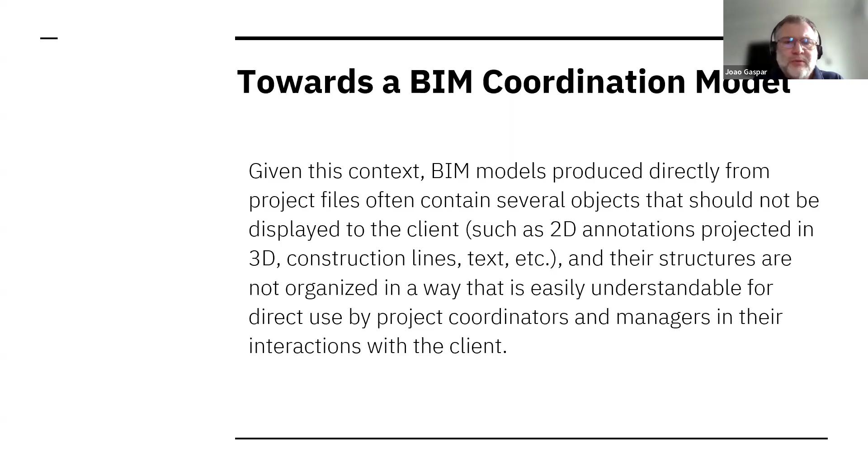So this is what I was talking about: during the infrastructure design process in 3D modeling software, such as Civil 3D, OpenRoads, and others, files are organized and produced based on the designer's vision, aimed to efficiently represent the best on-site execution of the technical solution. Given this context, BIM models produced directly from project files often contain several objects that should not be displayed to the client, and their structures are not organized in a suitable way that is easily understandable for direct use by project coordinators and managers in their interactions with the clients.

So when opening a raw design model directly in Trimble Connect or Navisworks, Solibri, or other BIM coordination software, we will find it necessary to reorganize the model, eliminate objects, and make other adjustments. So I'm going to show you how you can adjust these raw infrastructure design models into IFC 4.3 models suitable for BIM coordination, improving communication and model visualization in coordination software without interrupting the designer's work.

This design model that I'm going to use as a reference for the hands-on is a design model from a specialist called Elliot Grubb. From this specialist, I took the DWG model from an Autodesk University presentation. And here's the credits for Elliot for the design model that I used in this presentation. I don't have any more PowerPoint slides, so I'm going to use the software to tell you how this can be done.

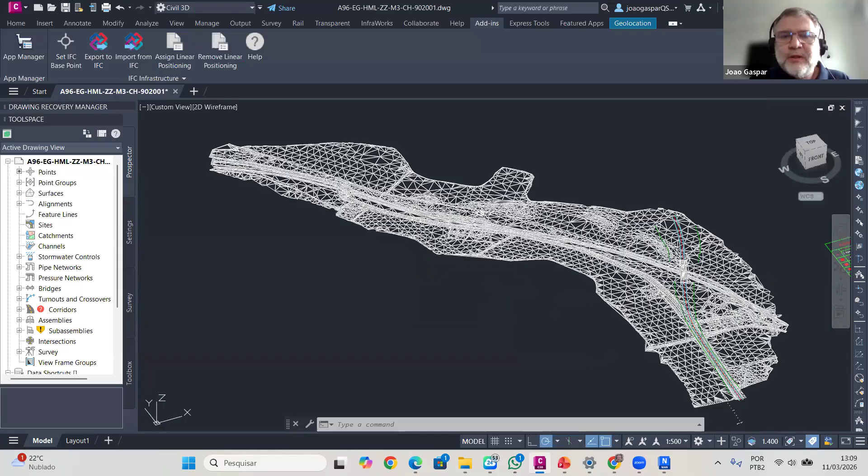So we have Civil 3D software here with the design file, and it's structured in the way that the designers need to work. And we know that we have to copy these models or export these models as IFC in order to show them to coordinators and other strategic positions in companies, or the parties in the contract, so they can view and discuss the design.

Usually the process of structuring the model so that it's correctly shown in IFC is not a streamlined way yet. Sometimes the designers spend a lot of time just doing these adjustments, which will be used for just one meeting, instead of doing what they do best, which is the design.

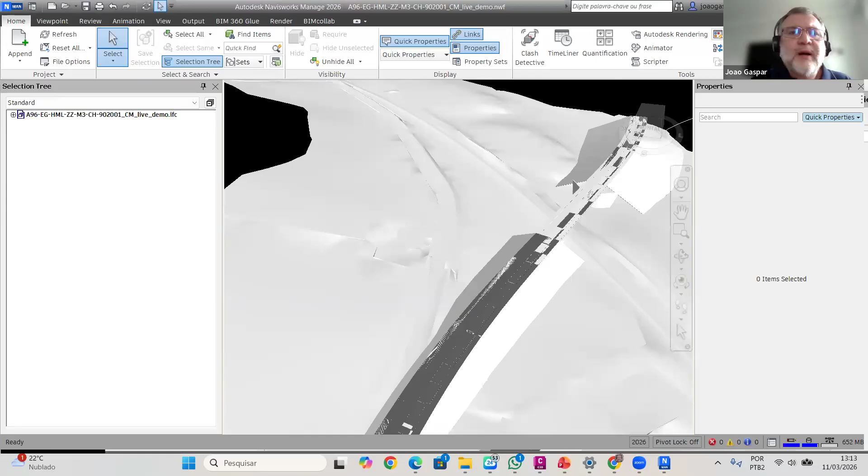I'm going to open the as-is model using Navisworks. I have already opened it here. Let me see if I can see the name of the file. Oh no, this is another one that I'm going to show you. I'm going to open the as-is model to show how Navisworks opens the design model in IFC without any adjustment. It's also already here. So this is the IFC model that came from Civil 3D without any adjustments.

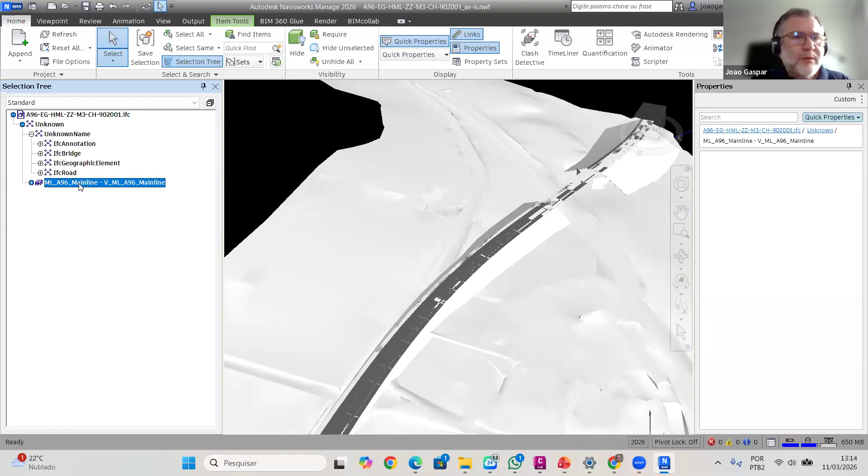And here is the spatial hierarchy tree. You can see that we don't have a name for the project or for the site. In fact, this is the IFC site and IFC project, and we don't have a name for them. We have a lot of features from the IFC annotation entity. We will not use this. We are going to use just the spatial hierarchy tree.

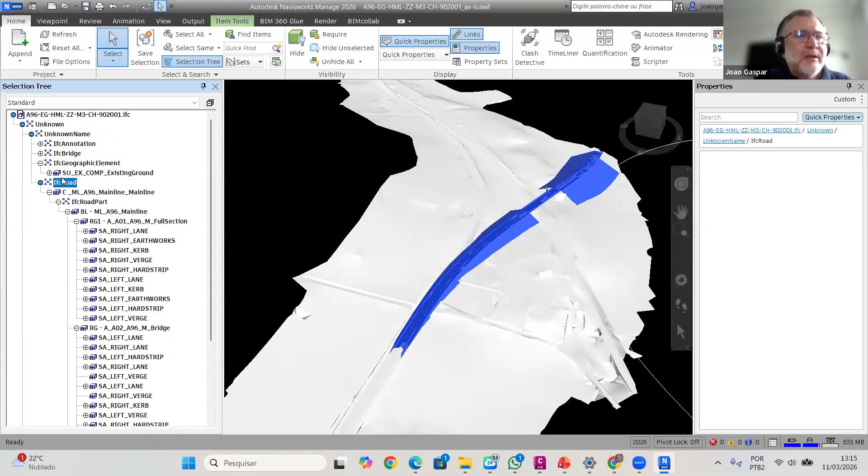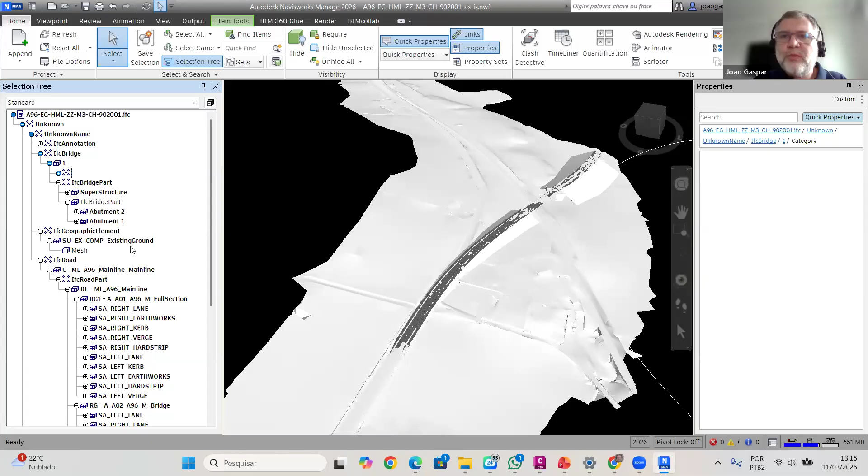We have an IFC road, which is the design of the road, and we have here a road part and other road parts, and we can see it gets a little messy, and the geographic element without a name that I can understand. We have a bridge which is called just number one, entities without names, and bridge parts inside bridge parts without the necessary structure, which makes it difficult to show in a coordination.

If you open this IFC model in other software, as you are going to see, I'm going to open it in Solibri Anywhere, in BIMcollab Zoom as well, and in BIM Vision. I think it's nice for you to see that different BIM coordination software show us the information in different ways, and you will see which way works best for you.

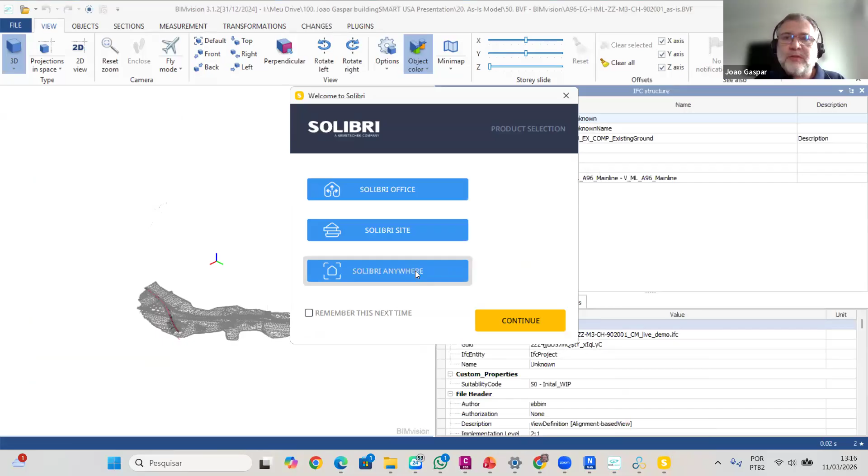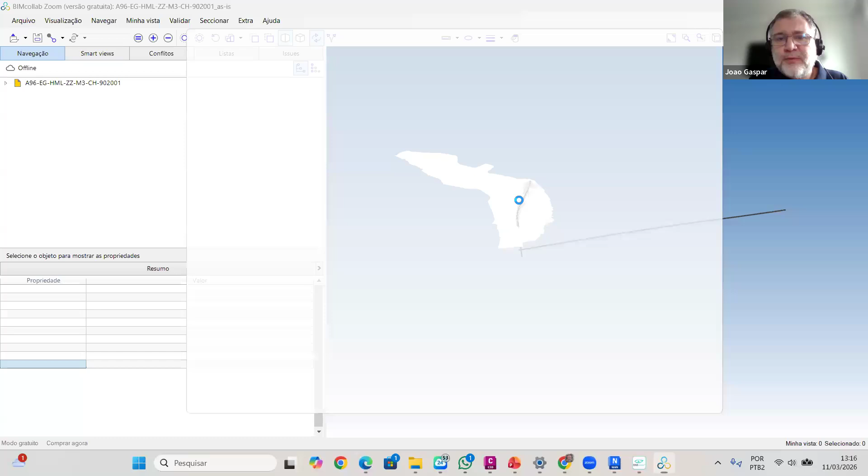So that's the way, because it's not the same way that the information is shown in the software. So in BIMcollab Zoom, we have this kind of view and this kind of structure. So we have again unknown name. We have a bridge without a name.

So all of this is happening, and this is the way that the model comes out from Civil 3D without any adjustments. We have elements, entities that don't have any element inside, so maybe they should not be here. And we have a lot of issues that we can correct, we can adjust for better information in a coordination meeting.

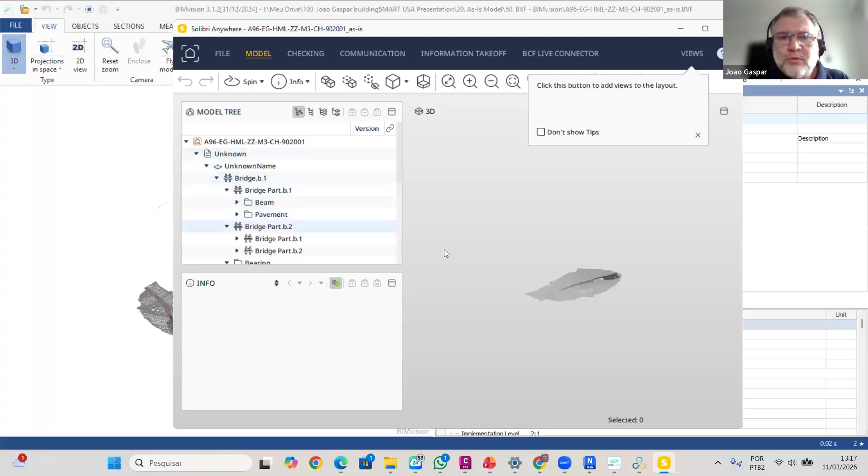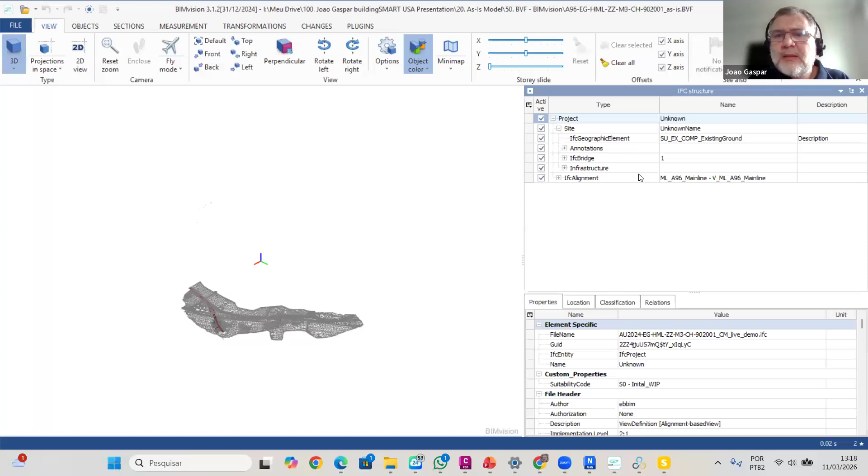And we can show that it happens, the information is not quite well structured in any of the software that you can use to check the information to go to your meeting, right? I'm using a software called BIM Vision here, the free version, and I would like to take a pause on this software specifically, because it's the only one that I know for now that you can see at the same time.

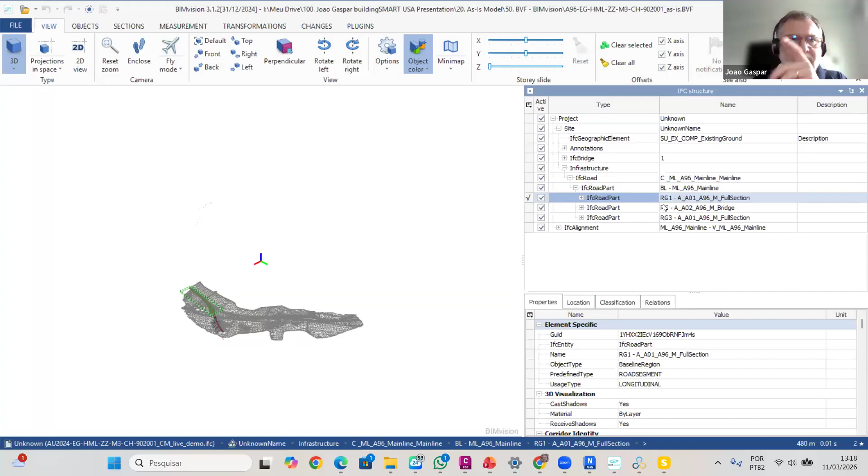You can see the type, the IFC class, and the name in the same line, and it's very good for me to see which road part is called by that name, without going to another menu, or without clicking, or without looking for it in another part of the screen. So this is very nice for me to see.

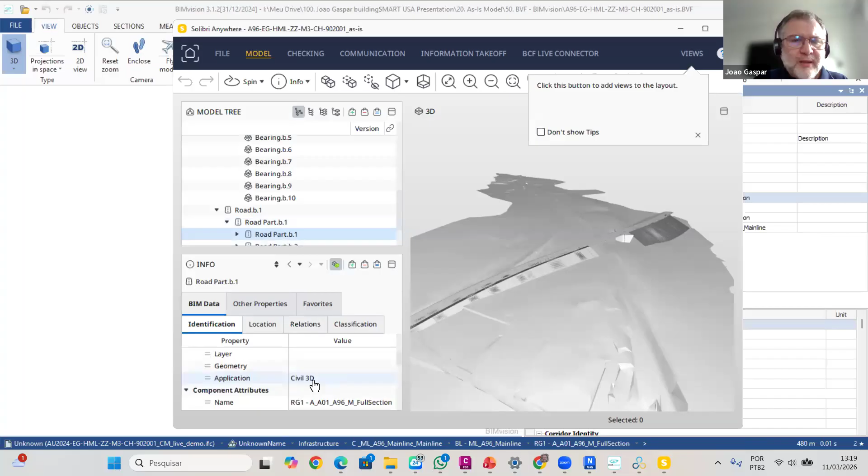You can see that we have some difficulties here in some software that I can't read in a very easy way. I can't read which is the name of this road part. I have to go down here to check, and it also happens in another software. I have to open the menus to see which is the name of what part or what entity.

And I'm going to use this one software specifically here for this purpose. Then I can read just side by side. It's a very nice thing to show. All the software that I'm using is free to download, and all of this software can use the original or the adjusted IFC as reference.

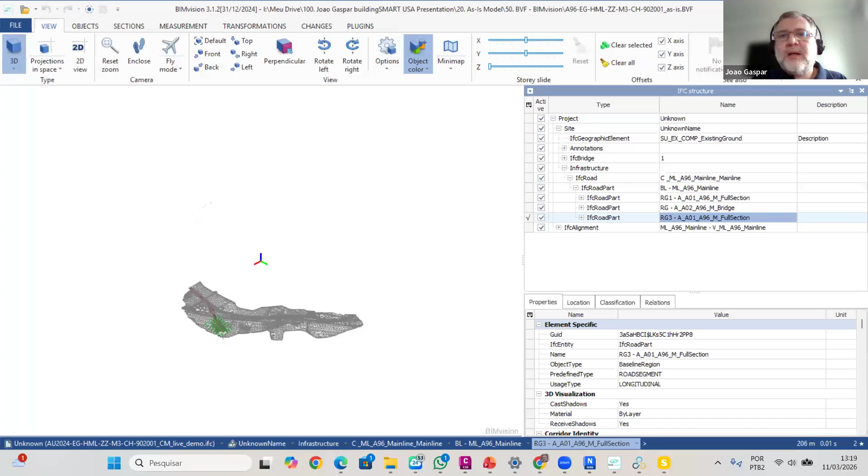So when I'm going to do my adjustments in the IFC model, I can do these adjustments just once in the IFC model, and all of the coordination software will show the updated info, right? And now I'm going to do some adjustments for us to see how it's done.

So I have another folder which I just called BIM coordination model, and I have two files here. One that I call the coordination model so far, which is the adjustments that I did so far, right? And another file that's for the live demo, which is the original IFC file.

And this file is just referenced in all other coordination files of all of this software that you can use to compare, and all of this BIM coordination software have different features. With BIM Vision, we can do some kind of analysis, some resources BIM Vision has that BIM Collab Zoom doesn't have, and it happens the same way with Solibri and Navisworks.

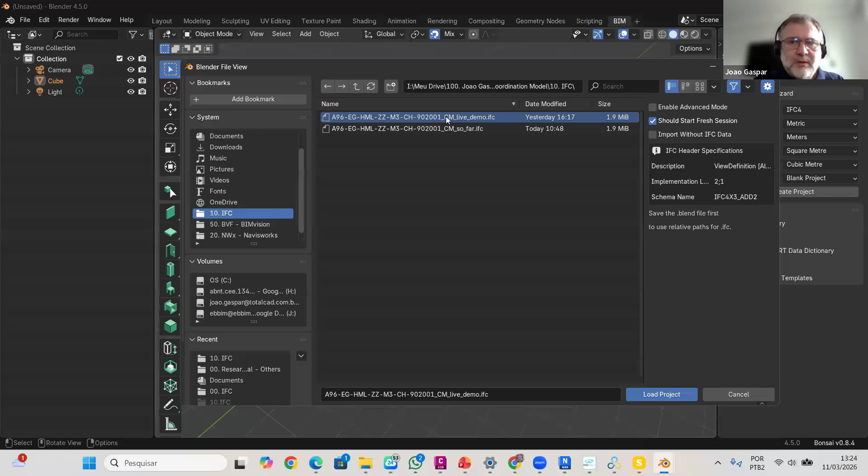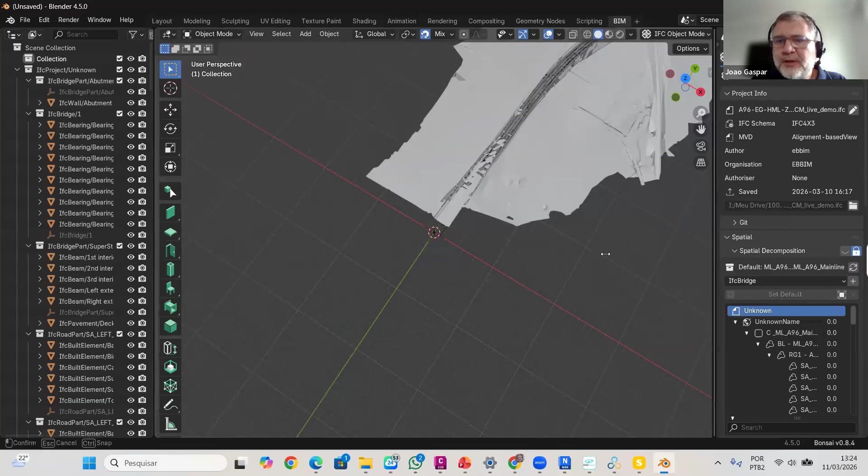So I'm going to load the live demo model in Blender with the Bonsai add-on. And now we have the model here. You can see the spatial hierarchy of the model on the right side of the screen. And you can see that, just as I was showing in Navisworks and the other software, you have the IFC project without a name. We have the IFC site without a name.

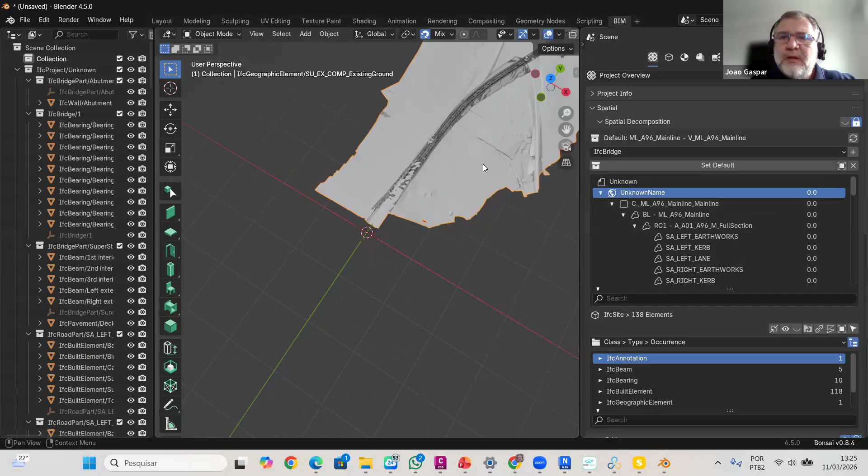We have the geographic element, which was the actual terrain, the actual ground, with some kind of name here that maybe doesn't matter for us to show the client, and other information that I want to adjust without, as I said many times earlier, interrupting the designers that are doing their job, generally with a tight schedule, right?

So here in Bonsai, I can just put the name of the road. A96 is the real name of this design. This road is the A96 in Scotland, as I have studied from Elliott's works, new road design, something like that. My concern here is just what is going to be shown to my clients. So I have to do these simple adjustments here, and I'm going to save the project.

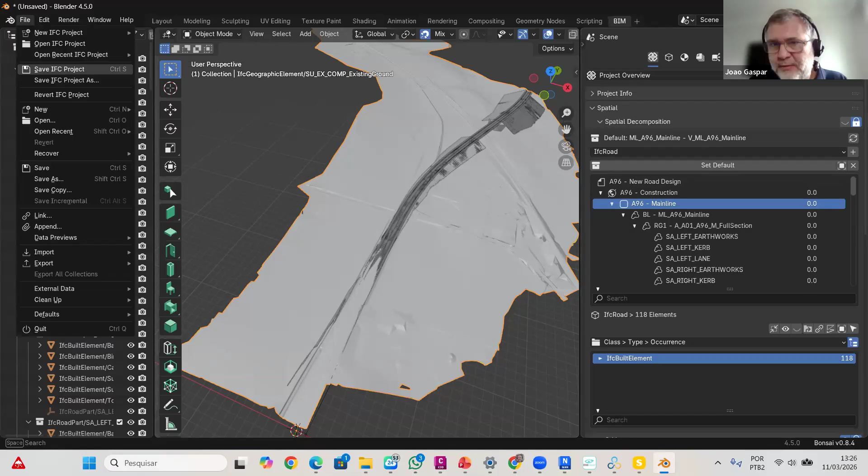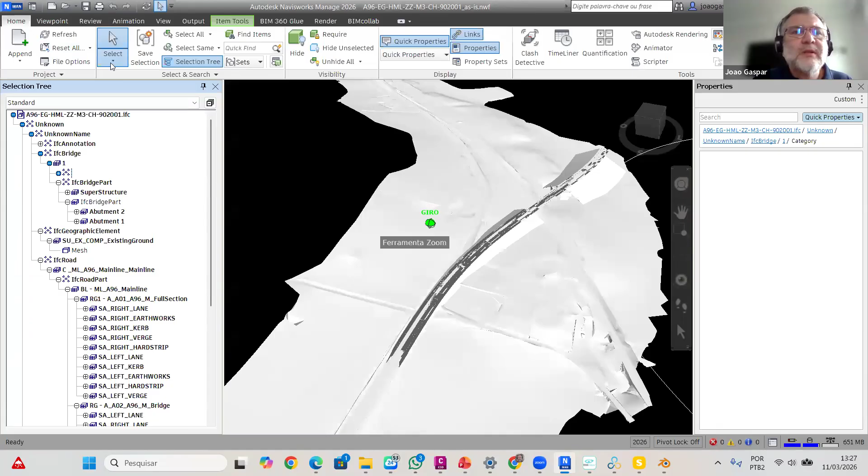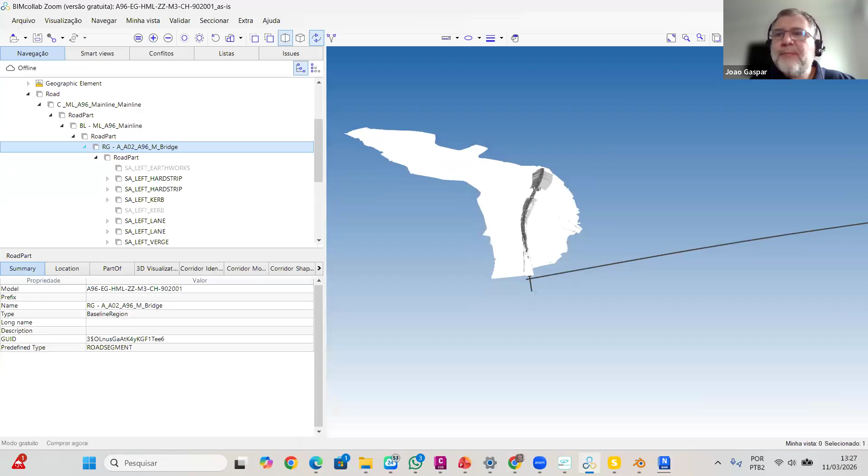I'm going to use this very old technique, which is the reference technique. When I open the coordination model in any of the software, I just have to update the information. I'm going to do this update in Navisworks. I'm going to open the live demo model, which is connected to my IFC model. It's going to show the correct information because it's reading in real time. And I'm going to open it in another software, BIMcollab Zoom, for you to see how it works in more than one software.

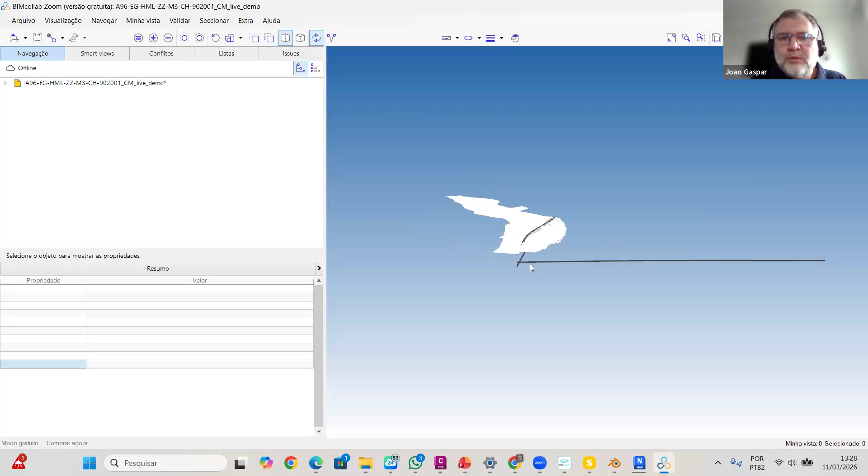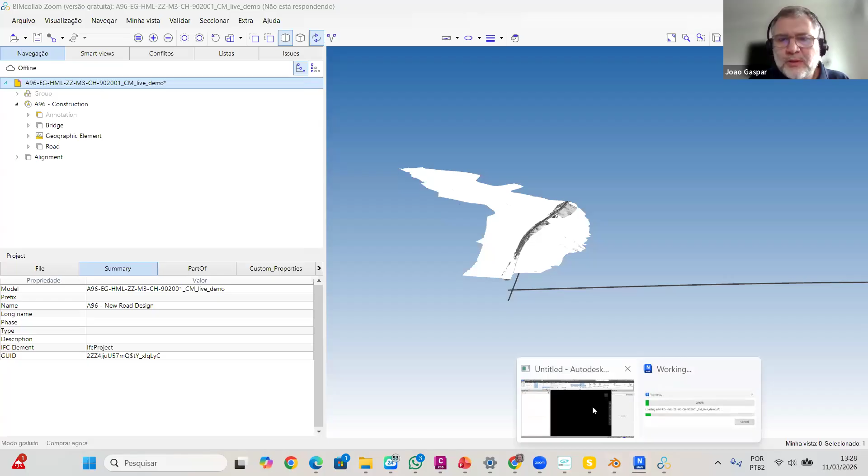And this is a very iterative process because we have a lot of little adjustments to do. You are going to learn that you have to do this going in and going out all the time, because you need to see, in the software you prefer to use in your meeting, if you are doing well. So now I'm going to update the model here in BIMcollab Zoom and in Navisworks as well, which is opening here.

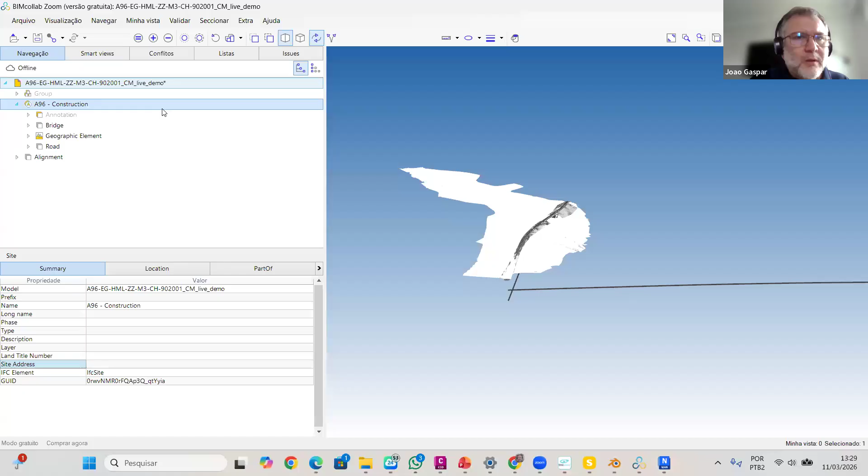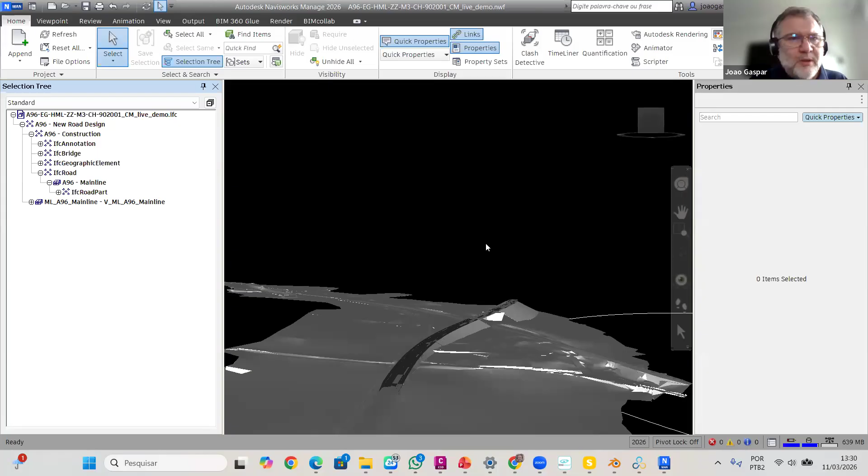I'm going to wait a little more for Navisworks to open. Yeah, and here you can see new road design. So I'm going to do this in BIMcollab Zoom as well. Here it has A96 construction. I haven't adjusted the name of the bridge yet. The name of the road I have adjusted, and it works and it's shown in any of the software I'm using to show the information. So this workflow is a very easy one, and anyone can do this.

I just forgot the name of the bridge, and I'm going to check it right away. The bridge is called One. The designer is doing a lot of work, so the bridge is just called One. I'm just pretending that the name is New Bridge. You can see that the new bridge has another bridge part here with two walls. This is a bridge part. This is another bridge part which has a wall inside. So a necessary bridge part, and two unnecessary bridge parts.

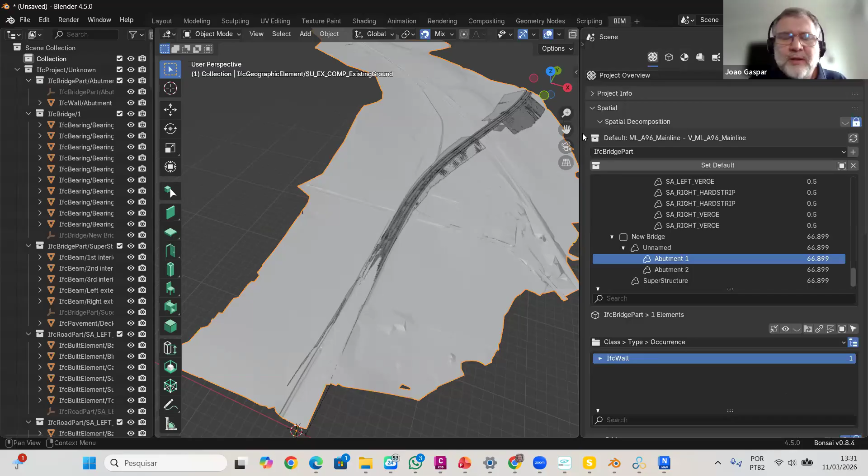I'm going to show you that we can also adjust the order and change this hierarchy part for this one up here, and streamline the model for the best comprehension of the client. And another kind of adjustment I can do here: I can do adjustments in property sets, in texts, and in data if I need to. I'm not going to do this right away, but you can do that here.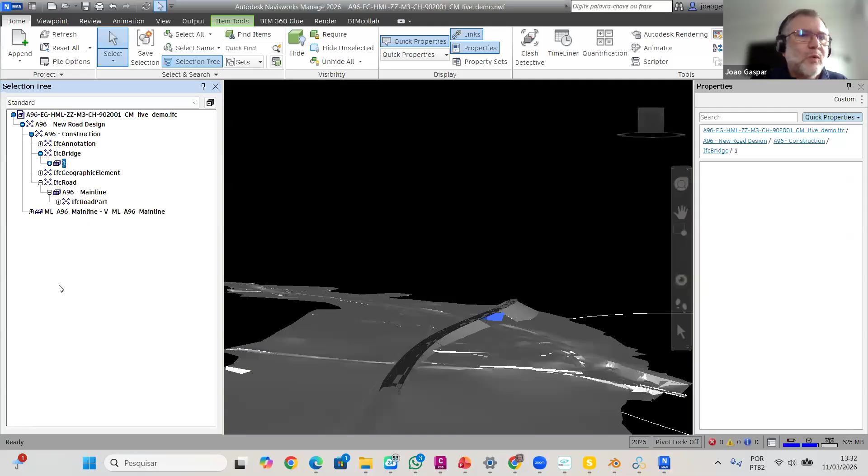I think the most important part of my presentation is showing you that you can do these adjustments in this model in order to show the client in a meeting, and you can check if what you are doing is doing well.

I just clicked on refresh, and now I have the new bridge name. I can do this process as many times as I need to, as I like, or based on the time I have to adjust this model, because it's very easy to do.

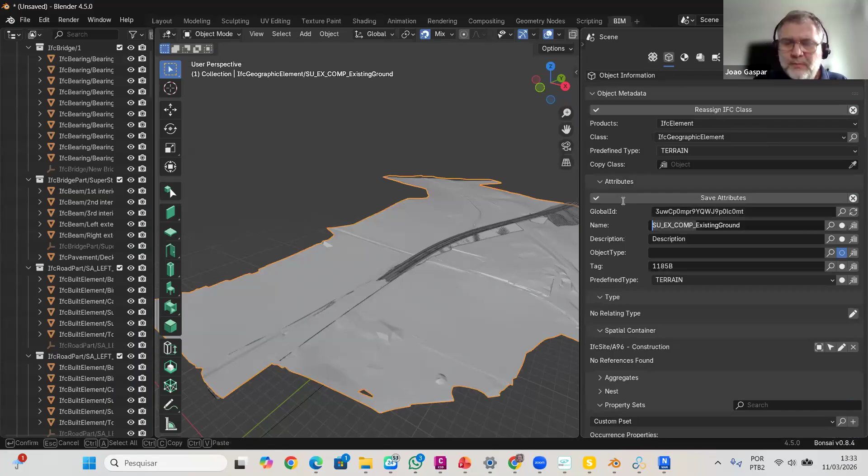So I just forgot the name of the geographic element, so I can do it now here and check it. In this case, I'm going to click on the element and click on this resource here, and edit the name of the model here. Once again, I'm going to save the design, and I'm going to check in Navisworks or any other software I like. And there you go.

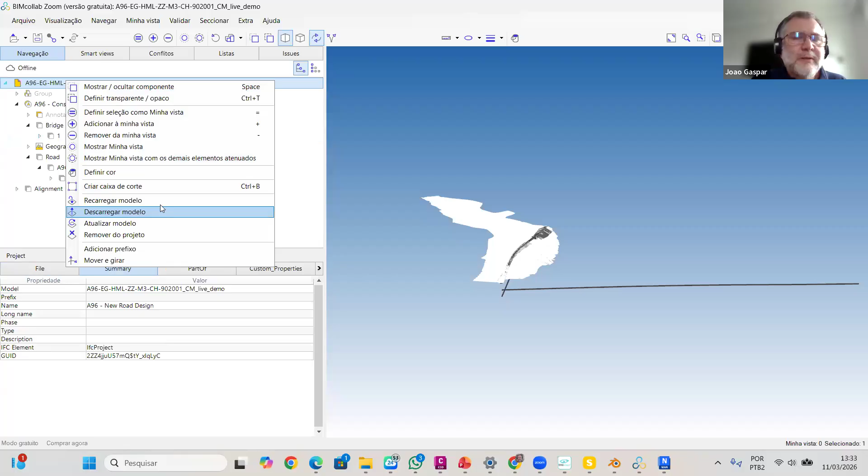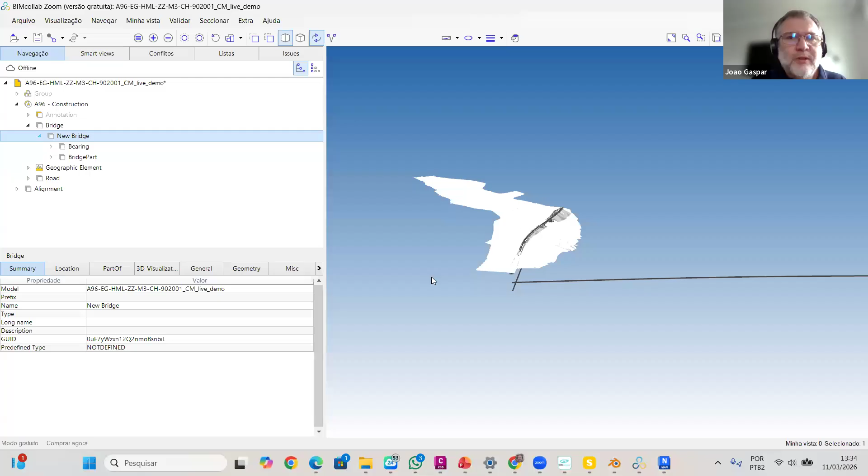May I bring your attention that I'm not talking about using this technique as the ultimate technique to produce the last IFC that I'm delivering. This is a technique that I see is useful in the coordination meetings, to show how the work is being done with the projects, with the designers. This is not a recommendation of finishing the IFC model with different information from the original design models. That's not the issue here, right?

I think that when everyone is satisfied and you are going to do the final version of the IFC model for delivery, then again you are going to check all of this information in Civil 3D. You are going to use the workflow in Civil 3D with the JSON files to put the attributes in the right positions, in a way that you can export the IFC model to reproduce with fidelity, as best as it can, the information from the design model.

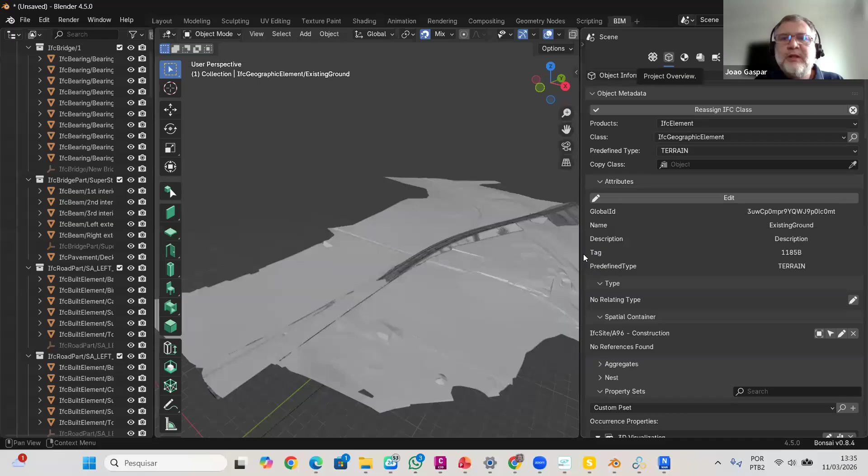But if you have a design meeting, in design meetings things change: can you change the information that is called from this name to this name? Can you change the property here to see what happens? And okay, I can do that. So you use this model to do the communication with the coordination teams, and you also can use this model to show the designers which modifications were suggested, and so the designers are going to replicate them in the original model. This is the objective or the goal of this presentation.

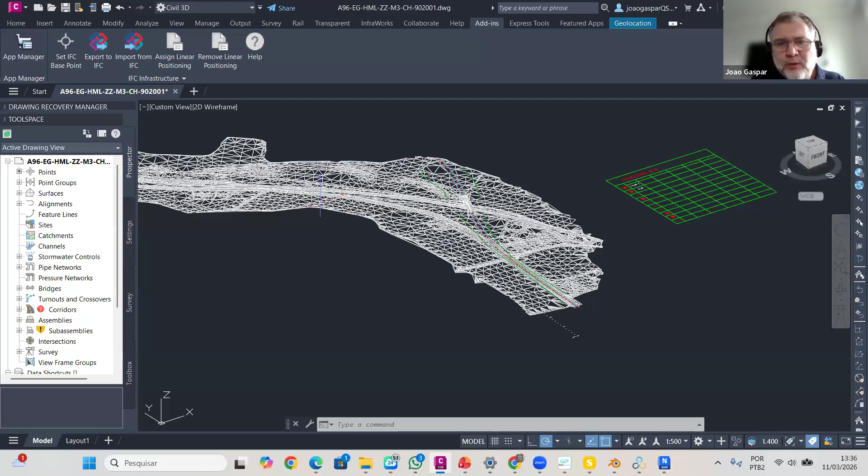And I think I just talked too much. I hope I could be understood, and you may tell me if I made myself clear. And I think, Tony, I'm just finished here. It's not a very difficult tutorial, it's supposed to be simple. And I am open to questions if you have one.

Okay, thank you very much. First of all, I hope you're seeing lots of applause and hearts and congratulations coming from the audience. Everyone is very excited, and obviously this has been quite valuable for everyone.

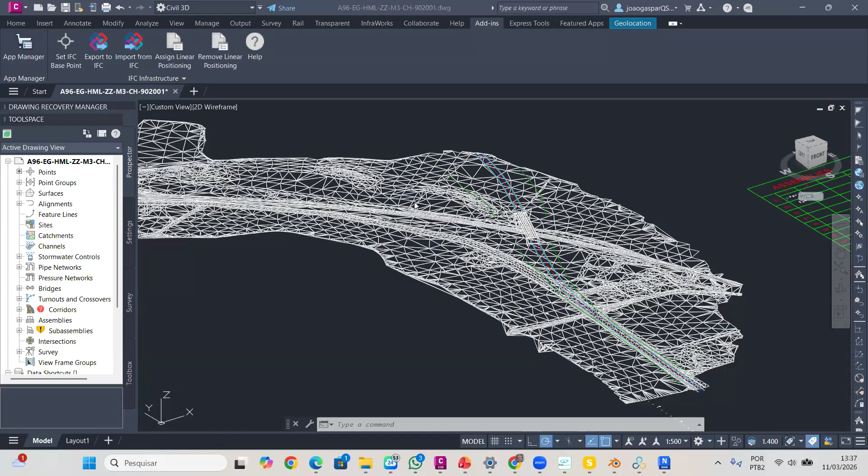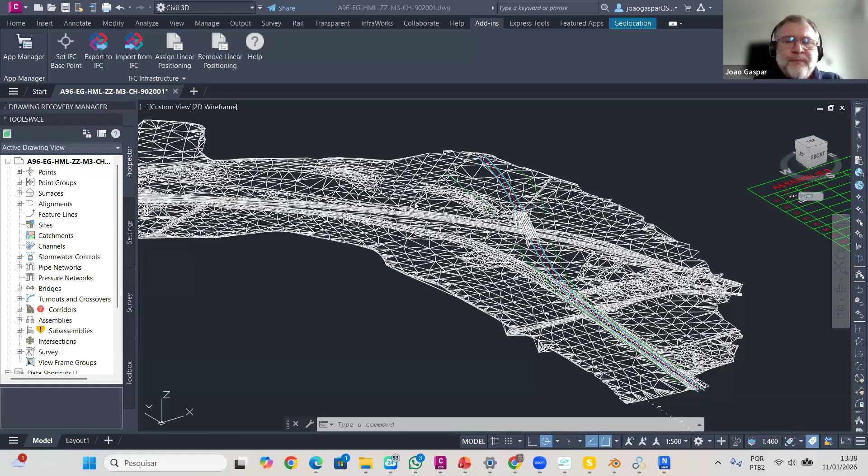Let's see, we do have a question from an anonymous attendee. Is it possible to configure IFC site and IFC project so they are exported correctly? Yeah, maybe this friend is asking if it's possible to configure IFC site and IFC project in Civil 3D. Yeah, it's possible. I know some road designers that understand how to do these adjustments right in Civil 3D or in OpenRoads directly, so we don't have to do these adjustments afterwards in Blender, right?

I know some guys that can do this, but it's not always the case. So when you are going to a coordination meeting the next day, and you open the IFC model that the design team has sent to you: so Joao, this is the design model for you to open in your meeting. And I open the design model and I see, oh, this name is not this project. IFC project does not have a name, or this IFC site has the incorrect name.

Instead of talking again with the designer, you may correct this, please, because my meeting is tomorrow, and it's something that the client will not like to see, their project with the incorrect name. It's not a good way for you to be shown, or to show your design, the design of your company.

But maybe the designer doesn't have time to do this adjustment for you before a meeting that is tomorrow. That's the way I thought useful to bring to my students, the majority of whom are in strategic positions in BIM. So they need to show... it's not good for the company to show a model with improvised or incorrect names, just the client name here.

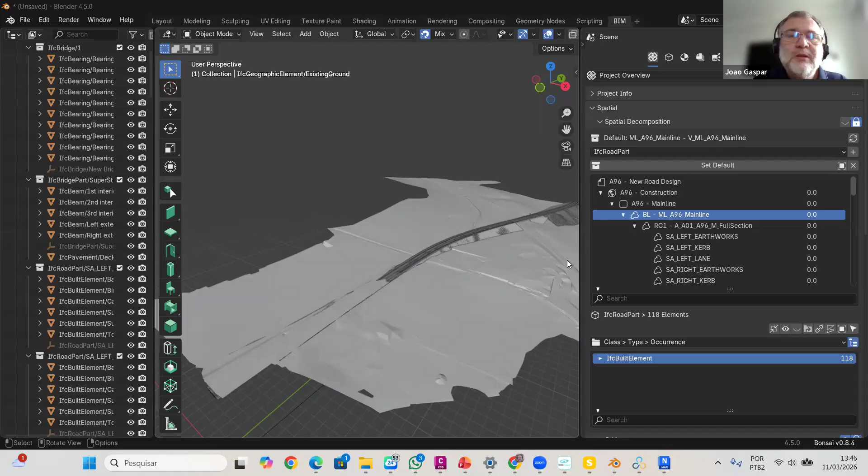You have a lot of scenarios in which designers are not prepared to deliver the IFC in the way that strategic positions need to do their job, which is meeting with the client and seeing what the client needs, or what modifications in the information the client needs to see. Maybe during the meeting the client asks us to change the name of something, or change the information. If I am the coordinator and I know how to change the information here and right away show how it's shown in Navisworks, maybe my client will like me better instead of saying 'I'm going to ask the design team.' No, I'm going to change it here, see if it fits well, and if you approve this, I'm going to ask the design team to make it a permanent change.

So it's a way to think about how this can be a useful tip for you to see. Professor Toledo is telling us to use IDS to check. Yeah, it's the right strategy for one to do when we have clients that also know how to use and what IDS is for.

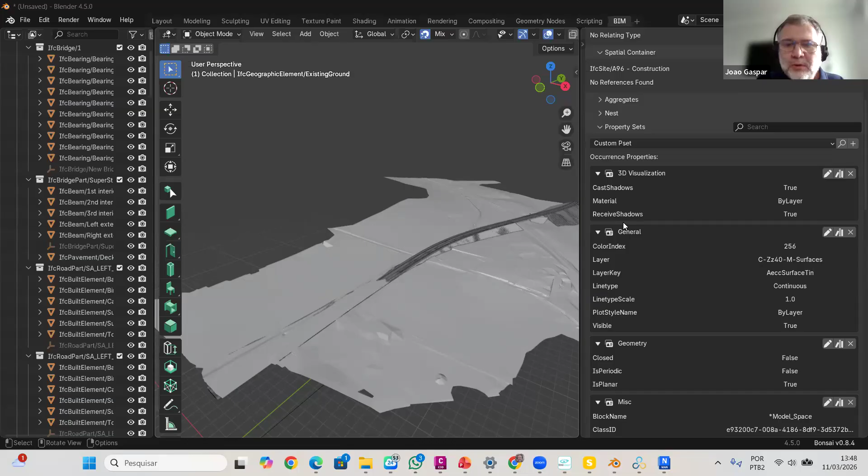When we meet a client who is the owner, maybe the owner doesn't know how to use IDS, doesn't know what IFC is, and just wants to see his name on these structures, the right name of the elements, and the right information in a meeting. That's all the owner wants. So this is a strategy designed for this kind of event, not really as Professor Toledo recommended using IDS. The best technique is using the correct ways to export the information from the original software, like ArchiCAD or Revit (Civil 3D).

Tony would like to answer the question about IFC site and project as well. Yes, you're doing great. Just go down the list, you're making people very happy.

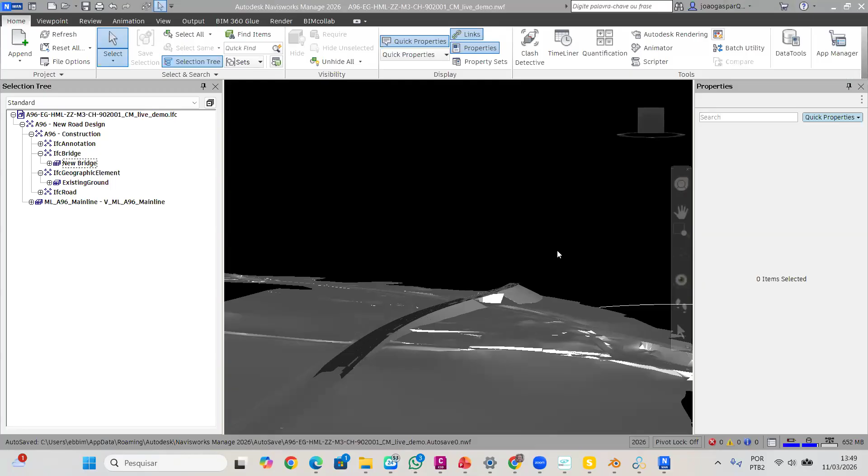Bruno is asking: in which process of your current workflow does an unnamed or incorrectly typed attribute hinder the operation? The incorrect, unnamed, or incorrectly typed attribute doesn't necessarily hinder the operation of a construction project. You're right on the spot. So if the designer doesn't use the correct name for the correct information for the IFC project or IFC site in order to export to IFC, it does not necessarily hinder the operation of the construction project.

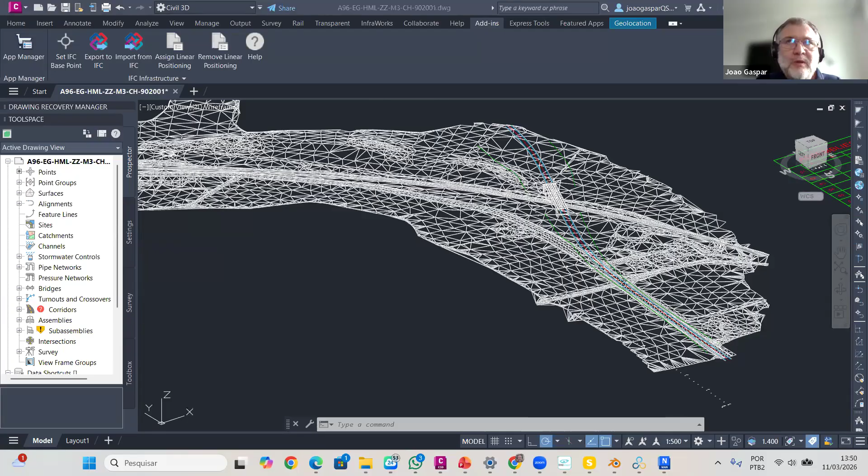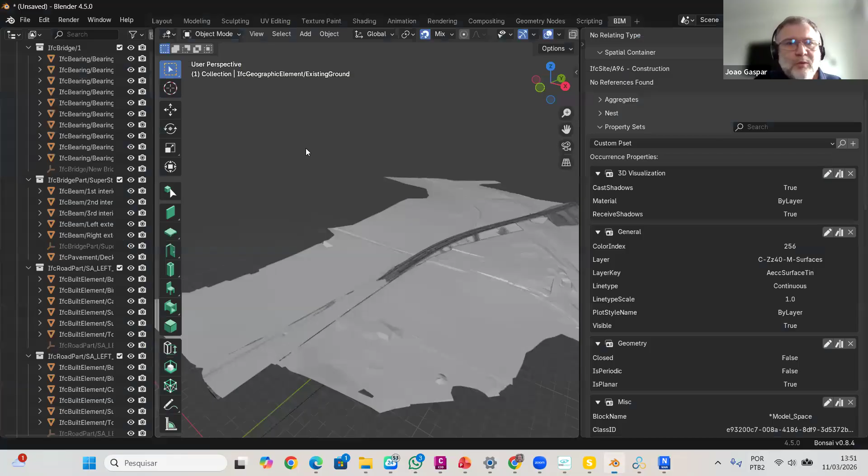I think that is what we're trying to bring up. The designer is doing a lot of activities or tasks in the model, and it happens that the designers don't stop to do the fine adjustment to export to IFC. As we all know, this kind of information about the structural hierarchy of IFC is not quite easy to adjust in Civil 3D nowadays. So it's a very frequent situation when we export the model from Civil 3D that it's not structured in a way that the layman can understand. So when you go to the coordination software, the information for the layman attending the coordination meeting is not correct, but this incorrectly typed attribute, like Germano said, doesn't really hinder or is a problem for the operation.

If I have any strategy for when the IFC is generated, not quite at day zero, IFC day three - no, never really. This kind of strategy changes from contract to contract, or according to the requirements of the client. So I don't have a specific rhythm or a specific process with day one, day zero.

It doesn't always work like that. It depends on the design phase, it depends on the knowledge of the designers of how to deal with IFC, it depends on the knowledge of the participants, the parties, the client representatives. We have clients that have a lot of specialists that will ask the designers to check the model with an IDS protocol.

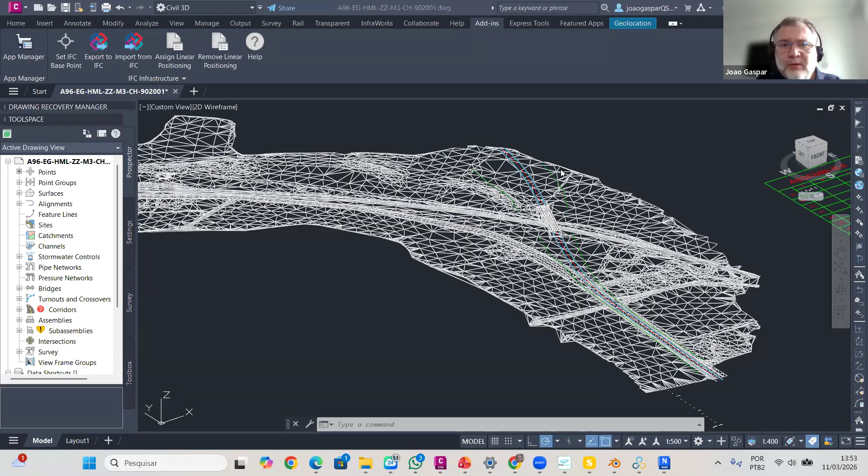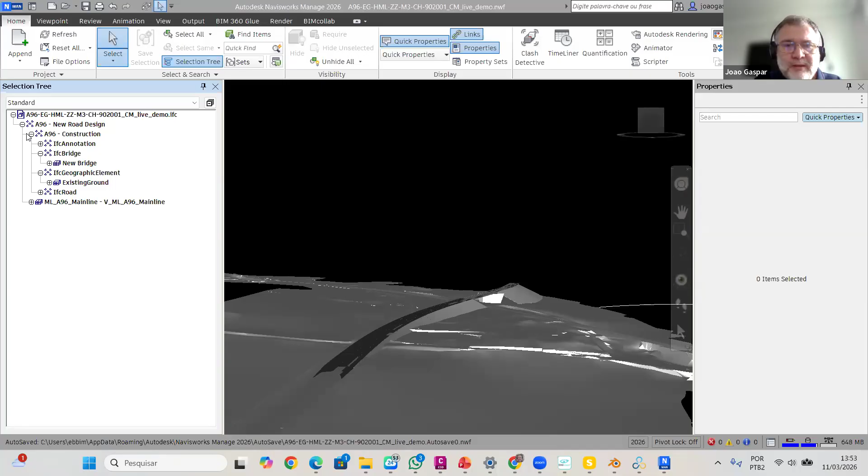We have other clients that are just funders, or just the buyers or operators of the future construction, the future infrastructure site. They don't know how to deal with IFC, but they would like to see the right information in the right spot. So we don't really have a workflow that fits all in a specific time schedule or day schedule. I think, but maybe another colleague has some tips about this issue, right?